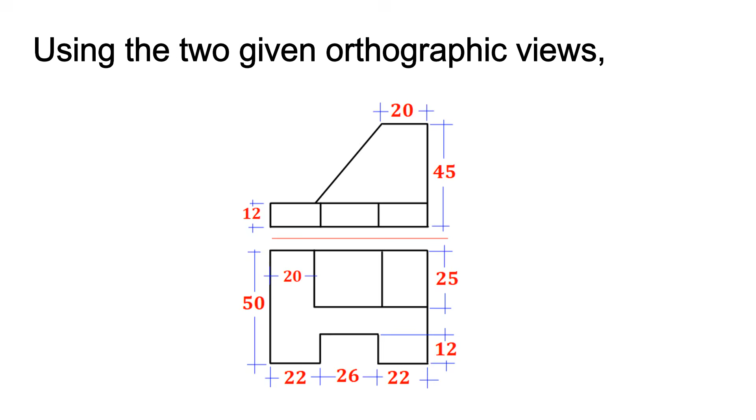In this video, we'll convert two given orthographic views into a full isometric drawing. We have the front view and the top view. Our goal is to build the 3D isometric view step by step.

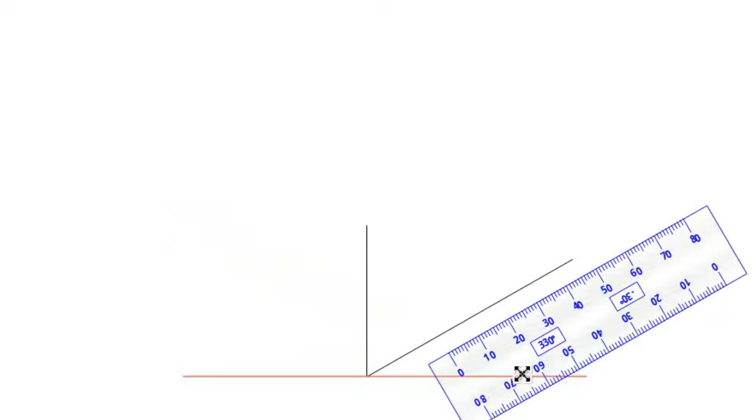Let's get started. To convert orthographic views into isometric, we need 3 axes. Isometric means 3D. From the top view, which is placed below the front view, we get x-axis equals width, y-axis equals depth. To become 3D, we need one more axis, the z-axis, which represents height. We get the height from the front view.

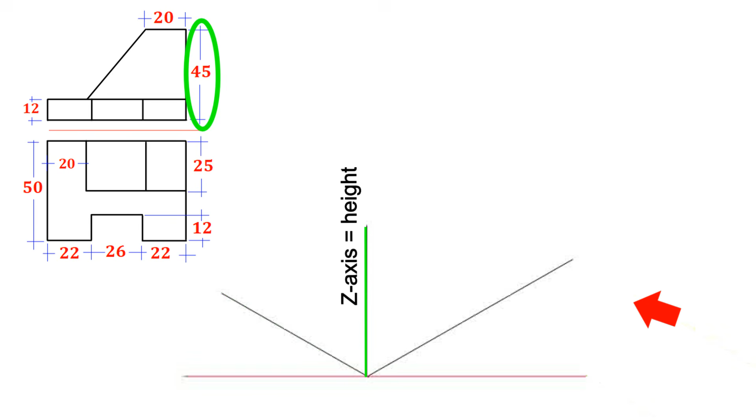When we take dimensions for each direction, we need to use the maximum values from our given views. Now, draw the isometric box using these maximum dimensions: 70 wide, 50 deep, and 45 high.

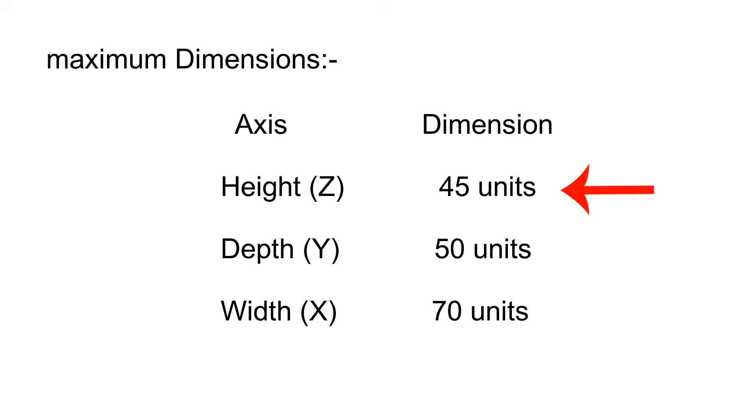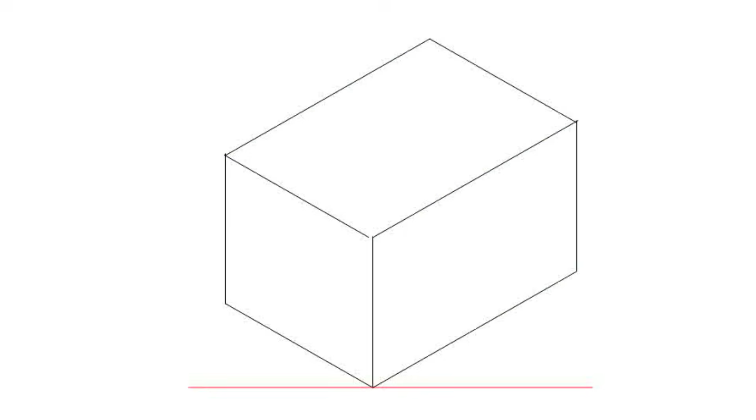Now that we have the isometric box, we can build each feature inside it. Start from the bottom and move up. Look at the front view. At the bottom, there is a rectangle with height equals 12 units, width equals 70 units. Remember, width is on the x-axis, height is on the z-axis.

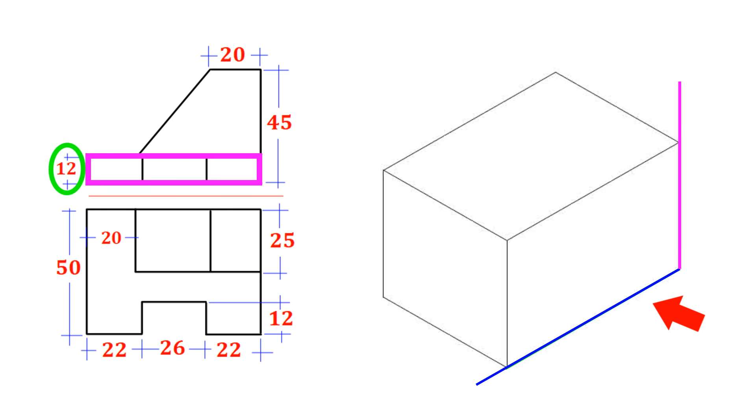Now, from the top view, we get the depth information, which is 50 units. So, from the front view, we know how far up to go to make a plane.

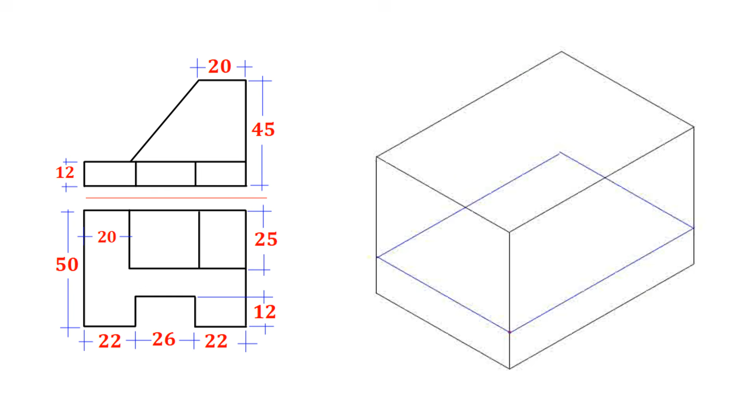On that plane, we use dimensions from the top view, because the top view gives us both depth on the y-axis, width on the x-axis. On this plane, draw a 50-70 rectangle, then cut out a 26-12 rectangle from the bottom center, as shown in the top view.

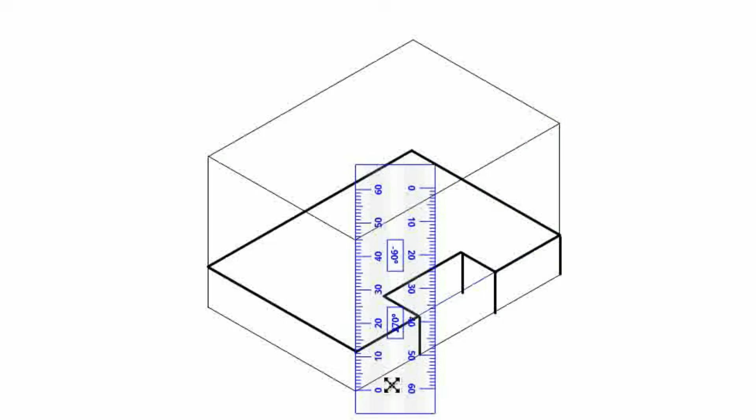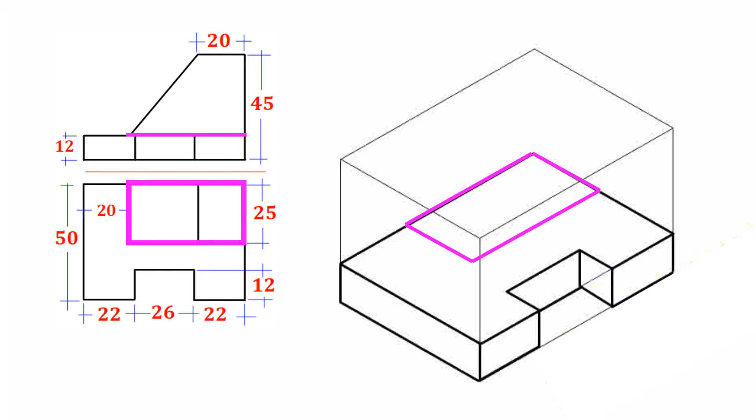Now look at the top view again. There is a 25-50 rectangle. This rectangle becomes a sub-isometric box when we extrude it upward to the full height of our original box.

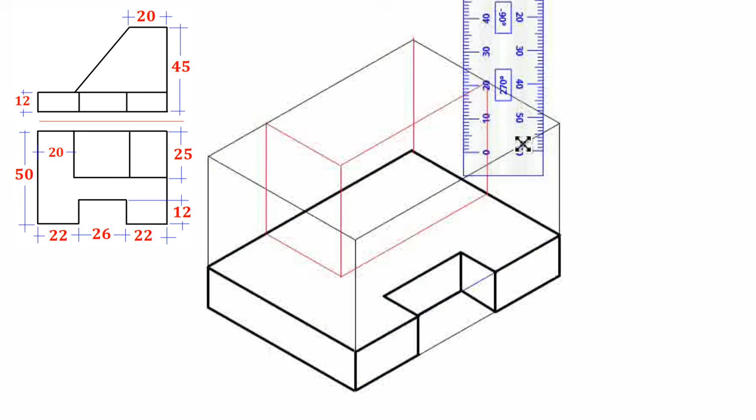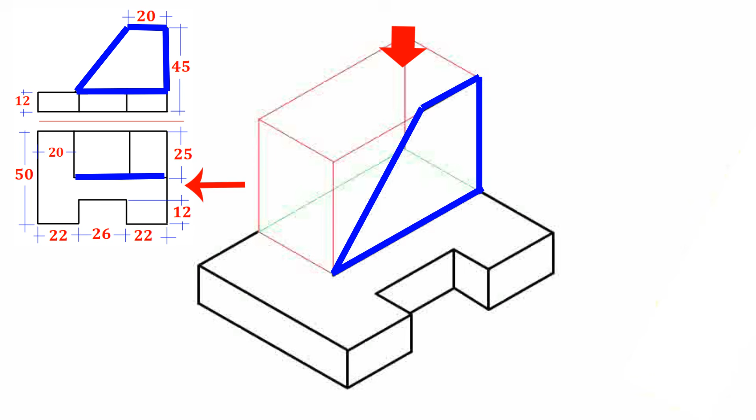After making this sub-box, we need to add a feature with an inclined line, as shown in the front view. When we draw this feature, it looks correct from the front. But when we look from the top, it's not correct yet. So we need to extrude it in depth by 25 units.

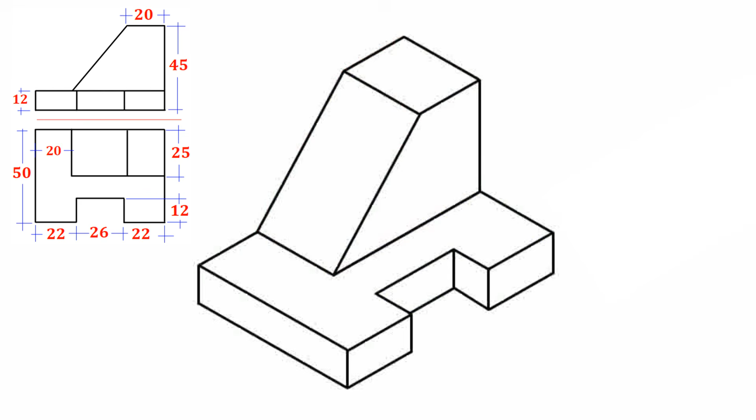Now, when we check from both the front view and the top view, everything matches. At this point, your isometric drawing is complete. You have built the 3D view from the two given orthographic views, the front view and the top view.

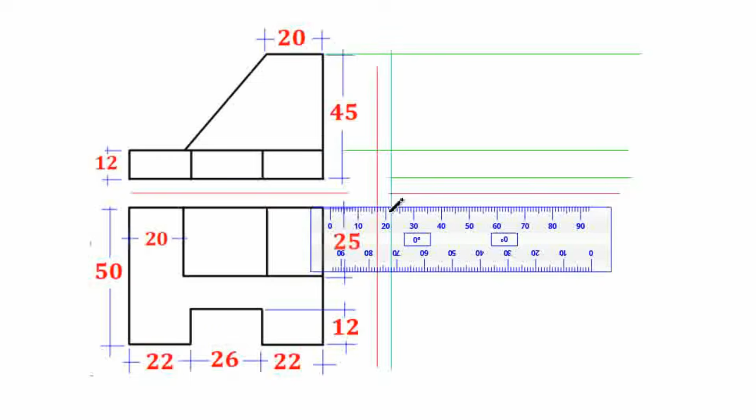If you need to generate the left side view, here's how. Step 1: Project horizontal lines from the front view and the top view. Lines from the front view go straight across into the side view area. Lines from the top view cannot go straight across. They need a 45-degree line to change direction upward.

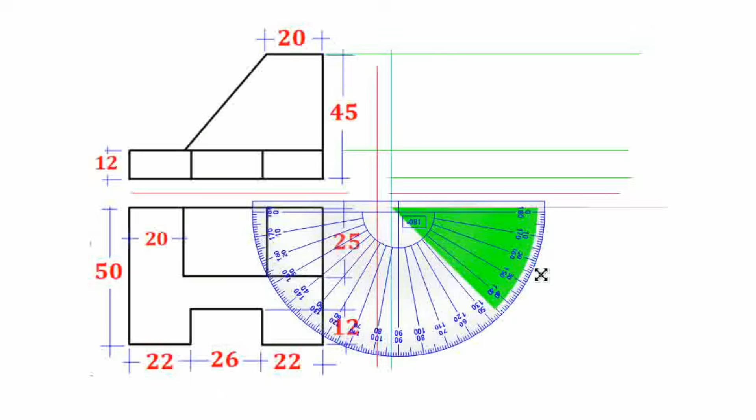How it works: Lines from the front view give you height information for each plane. Lines from the top view give you depth information. What you will see in the side view, from the side direction, you will see a 12 times 50 rectangle.

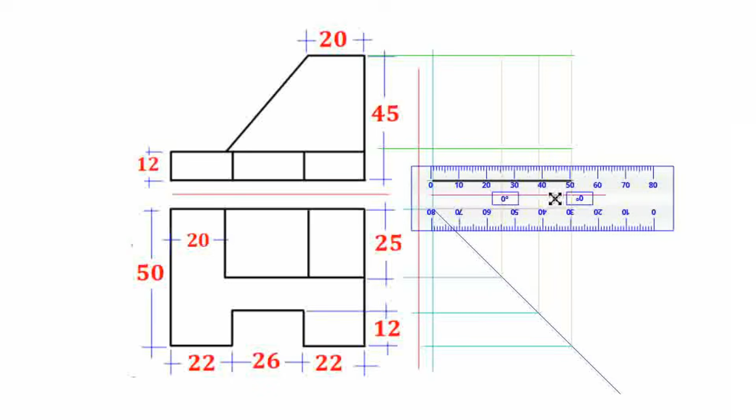But this rectangle hides a 12-12 square behind it. To show this hidden square, you need to draw it using dashed lines, hidden lines.

Now for the inclined plane. From the front view, this inclined plane looks like an inclined line. From the side view and top view, it looks like a rectangle. So simply draw a rectangle to represent it in the side view.

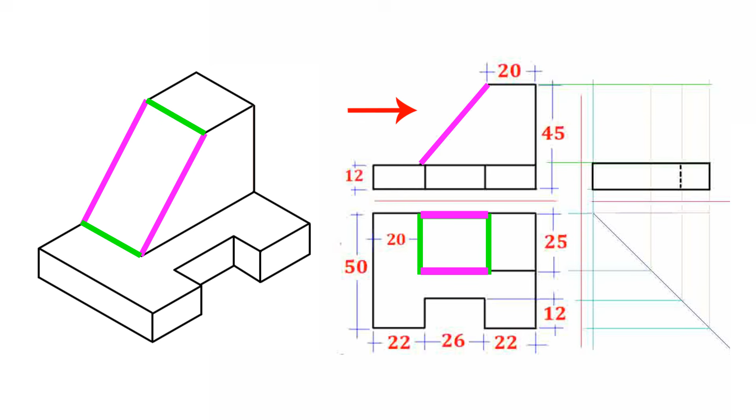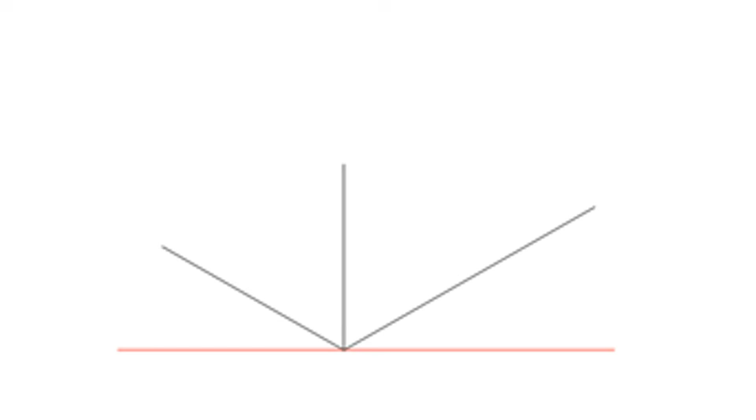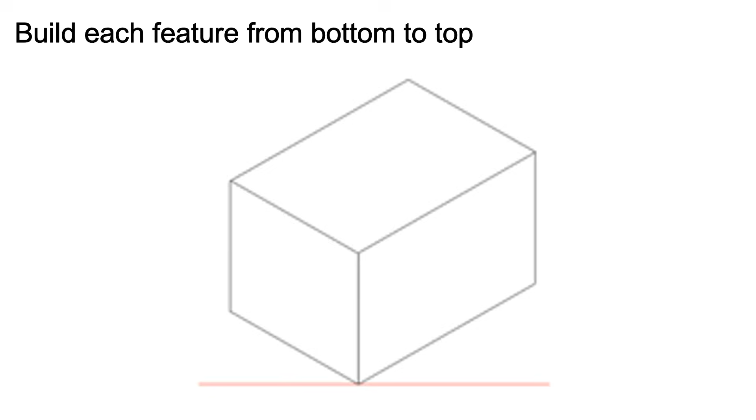Let's quickly recap what we covered. 1. Identify the three axes: x width, y depth, z height. 2. Find the maximum dimensions from both views. 3. Draw the isometric box. 4. Build each feature from bottom to top. 5. Use the top view for width and depth, front view for height. 6. For the side view, project lines from front and top. Use a 45-degree line for depth, and use dashed lines for hidden features.